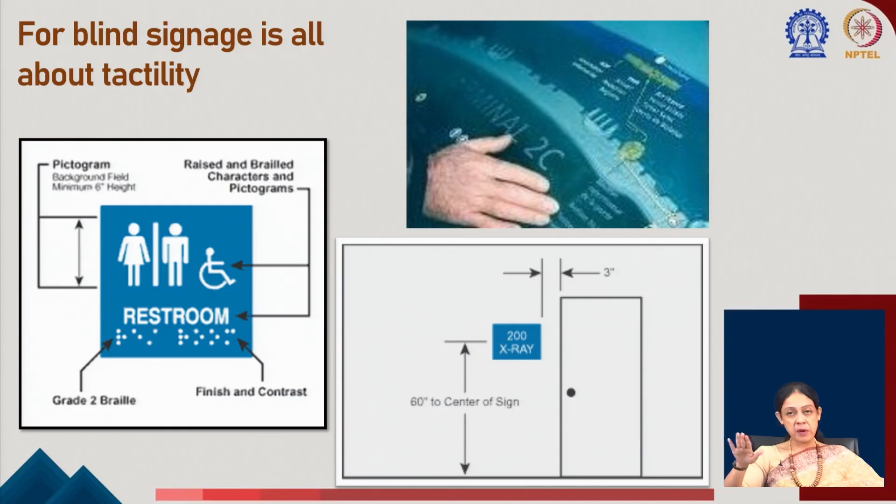As a result, there has to be some kind of restriction on such protrusions. But for people who have absolutely no sense of light, the signage will be all about tactility. It can be braille, or many times nowadays we are using embossed text, that is text which rises above the background so they can feel it and understand.

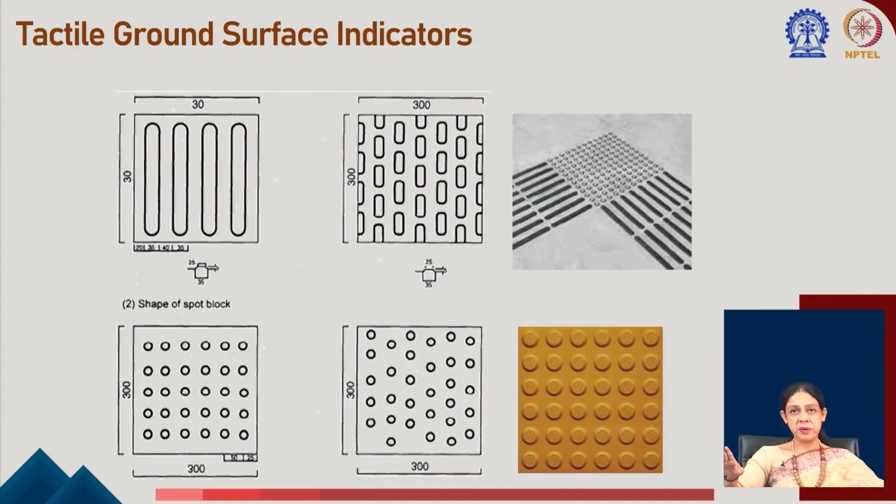TGSI is there, and we have talked a lot about TGSI, so I am not repeating that. What is essential is the proper placement or laying of TGSI. We are aware of directional tiles and hazardous tiles, but what is important for people with vision impairment is to guide them properly, and the most challenging thing is how to negotiate corners or changes in direction.

For example, when someone is taking an L turn, or negotiating a T junction or a cross, it can be something as simple as this, but it is preferred that you have 2 layers of hazardous tile for better comprehension and easy understanding.

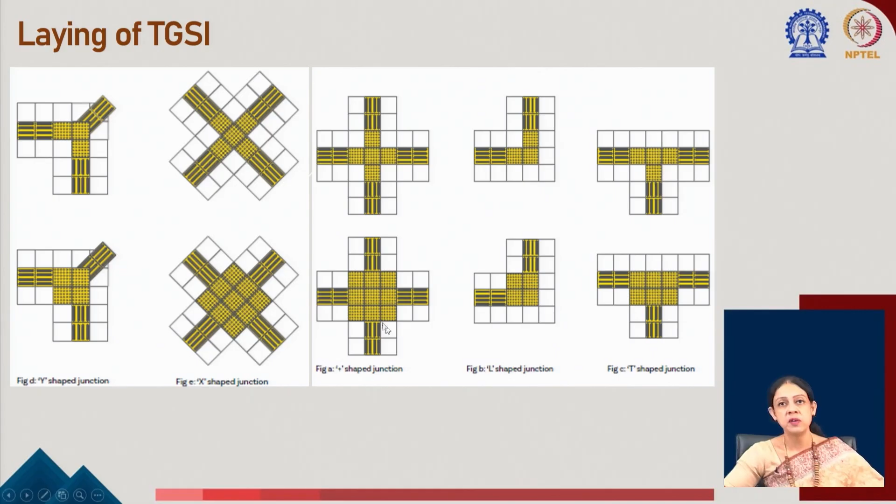Try to imagine when someone is touching the ground with the help of a cane, it is difficult to exactly pinpoint the location. They might be slightly moving the cane, so if you give a wider coverage of these hazardous tiles, it is always better.

There should not be any compromise with the laying of this TGSI, and this should actually lead to every point of interest, what we call POI. So every point of interest, or everywhere a visitor might be required to go, should be connected with the TGSI, and when the point has arrived, it should be indicated by a row or layer of hazardous tiles or warning tiles indicating the end.

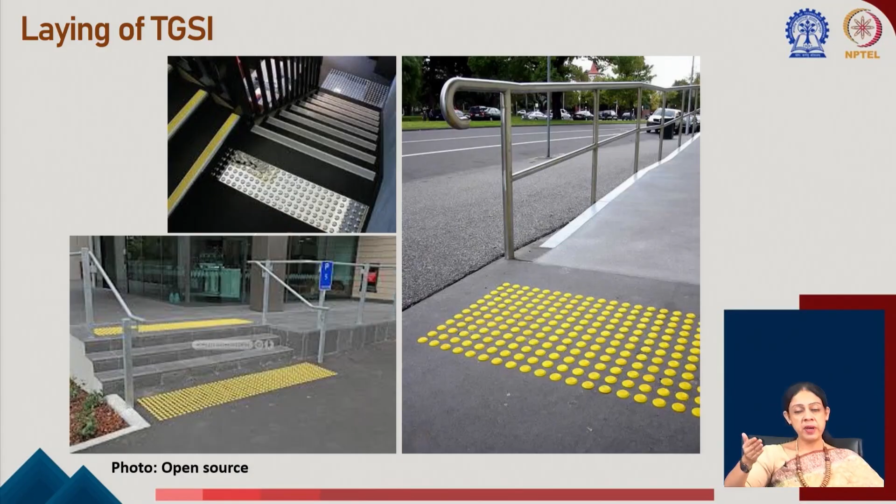Another important point is whenever there is a level change, there should be TGSI. Whenever there is initiation of a pathway or a ramp starts, as well as ends, these should be demarcated and identified by hazardous tiles. So any beginning or end of a route, at one level or at level changes, needs to be identified or marked by hazardous tiles.

In case there is some obstruction in between, the tile should be laid in a way so that people can avoid that. This might not be a major obstruction, but there could be a lamp post or a tree or something like that, so this laying of tiles is very important.

Needless to say, it should not be unnecessarily elaborated, the layout of TGSI. It should follow the minimum path. The minimum path of travel should be the guideline or the guiding factor for laying of TGSI.

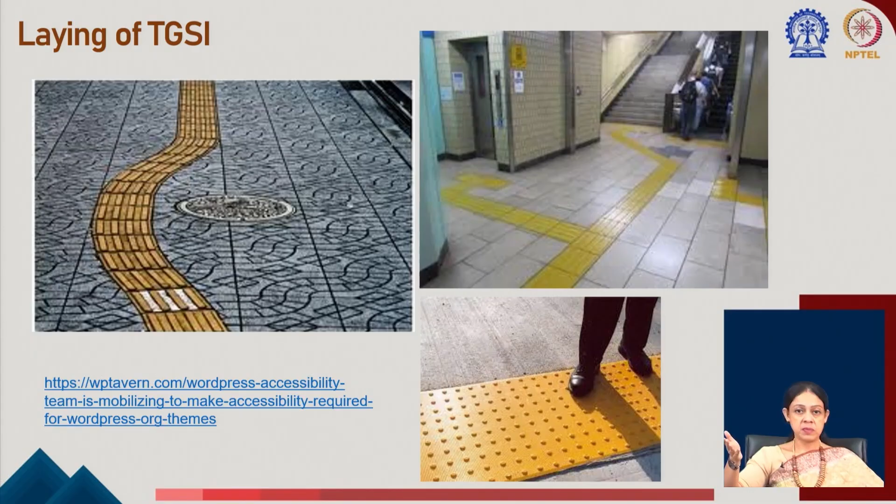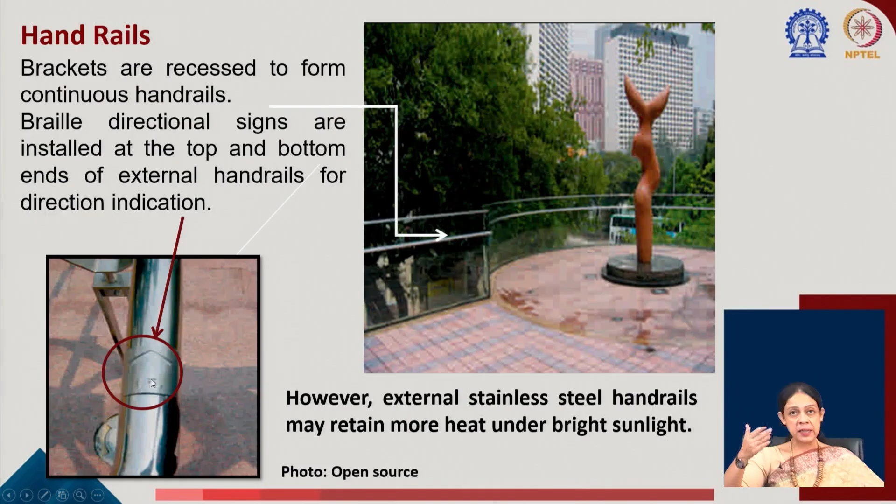These are an advancement over the physical layout that we talked about with RIAS, that is remote infrared audible signals, or signage system. This relies on infrared communication, and a company developed this under the brand name Talking Signs, which pioneered the implementation of infrared communication systems back in 1993. Mitsubishi Precision Company joined hands, and since then research and development has happened, giving us many advanced technologies in this field, which we call talking signs.

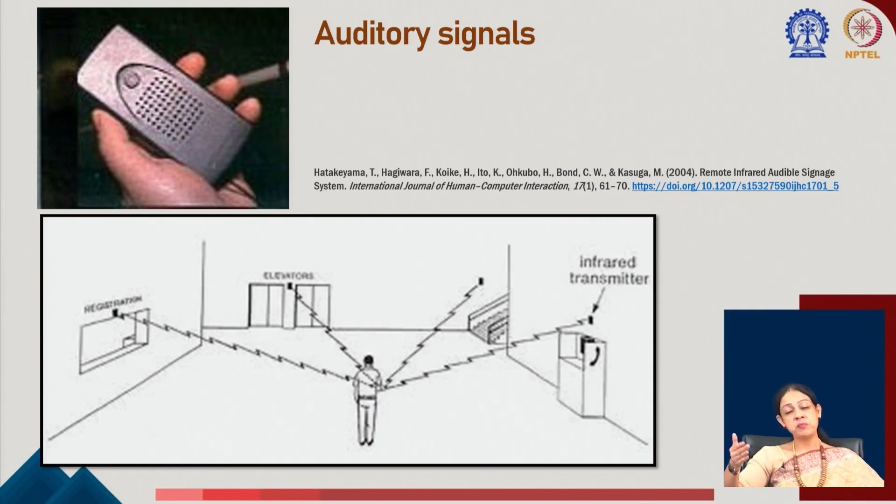The mechanism is that auditory signals are captured through infrared transmitters, which are planted at different points. Earlier we had TGSI, which would lead you to spaces, but would not tell you which direction to move to reach a facility. Infrared transmitters, if planted properly, will tell you exactly which facility is where - whether to go left or straight to reach the elevator or registration desk, something TGSI cannot do.

This is a receiver with two components. One is a receiver, generally accompanied by a neck strap, with speakers, on and off buttons, and sensors. When the infrared beam transmits the message embedded in the sign, these talking signs go to the handheld receiver, from where it is heard through the receiver speaker.

Simple mechanism, but very useful for independent navigation. This is the handheld receiver part, and this is the transmitter. So a transmitter placed above a doorway will give it an identity, so someone can follow it.

So what is the role of the architect and designer? To plant these transmitters in strategic locations, and to be aware of this mechanism, and specify transmitters which are used by the majority of people and have a good reputation in the market. If you remember the universal design principles, we discussed it should be compatible with various devices - so compatibility is important.

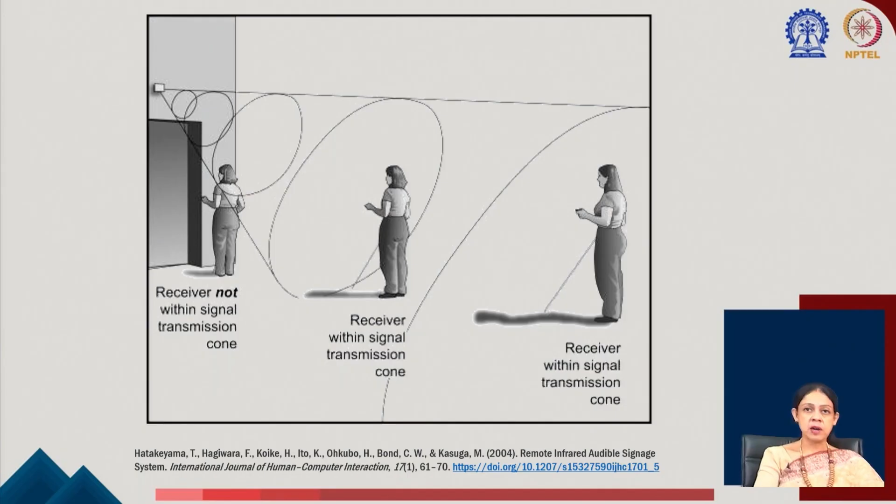Ideally, every transmitter should say what is available where - refreshment, coffee, newspaper, magazine, or that this is the exit to 4th street. This is how the person carrying the receiver gets this information.

Now, moving to design for people with low vision - these are different kinds of visual acuity problems. If this is normal vision, loss of central vision generally happens due to macular degeneration, advanced cataract with age, or lack of nutrition. Sometimes due to a head injury or cerebral stroke, half of the field of vision is lost.

What is the implication of all this? Someone with blurred vision due to advanced cataract would probably only react to very stark contrast - like a white door on a white background cannot be understood. But a brown door on a white background, or a glass door with a contrasting yellow or orange frame against a white background, can probably be understood.

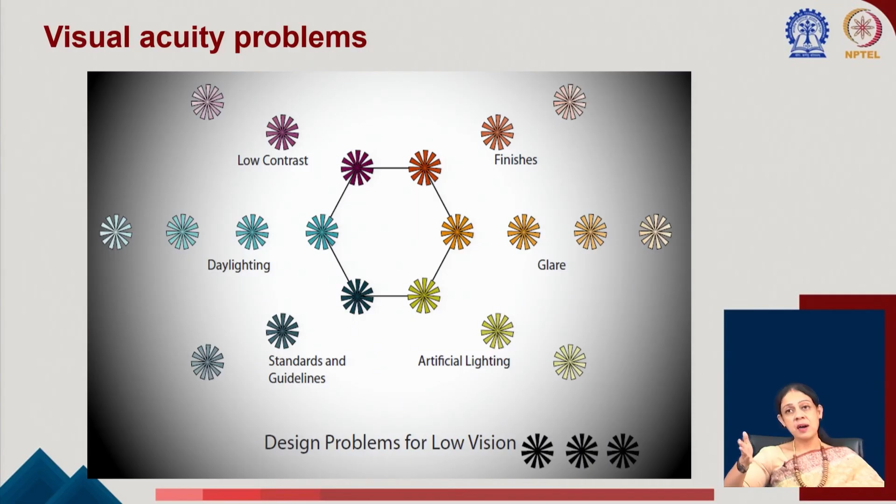So these are some visual acuity problems related to interior space design. Let us discuss this one by one.

First one is contrast sensitivity. Many times people are not able to distinguish an object which has got poor contrast with the background. People who do not have good 3-dimensional perception - if a white object is placed on a white background, they will not be able to appreciate the depth of it. So they cannot understand that there is something there, and they may go and hit it.

When designing spaces, particularly public spaces, many architects have a passion for monochromatic rendering, but that might be a problem for some people. This is just for the sake of awareness, because this happens due to the lack of ability to perceive an object in its 3D entity, its 3D form.

If there is a lack of contrast sensitivity, where the horizontal surface is ending and the vertical surface is beginning, it is difficult to understand. That is why, particularly in this hospital interior, these therapy spaces are generally marked by deep colors or dark contrast colors at the junctions. Also, the handrails or grab bars are painted in contrast color, and the edges of furniture are painted in contrast color so that people can identify it.

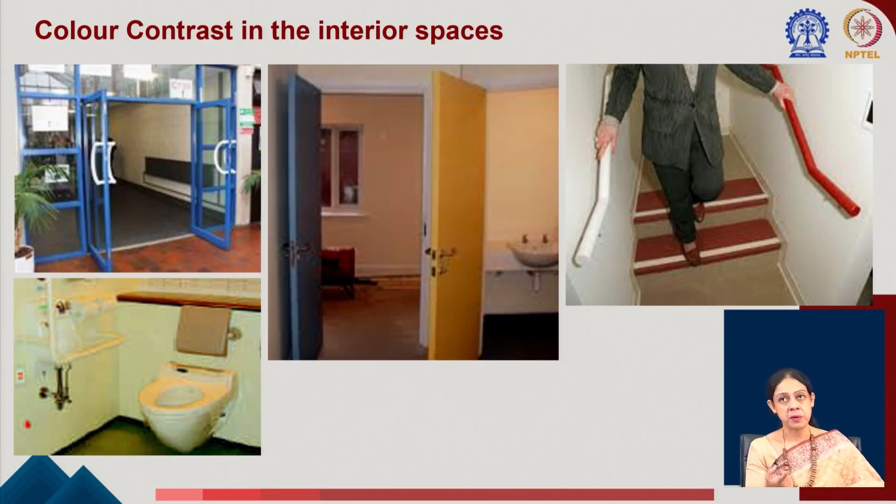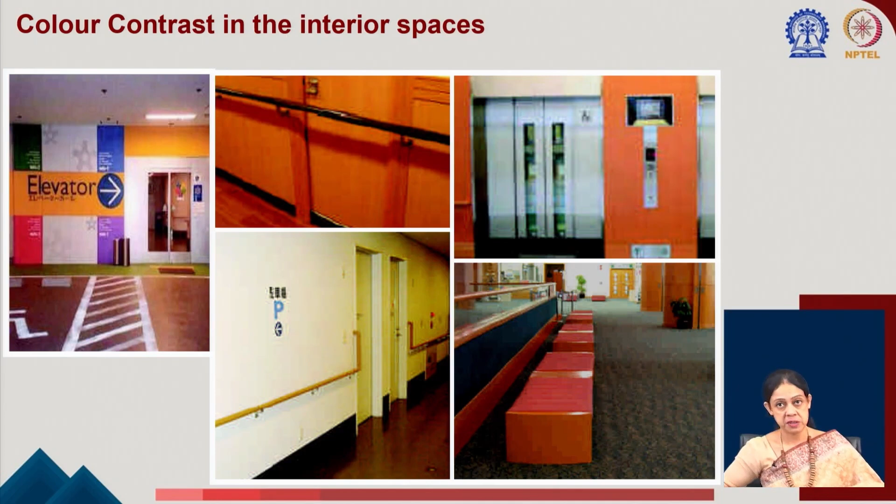When someone is coming from the parking, see the color - the elevator is in orange and dark orange contrast, it shows out. Against the orange, a black grab bar; the lift wall where the panel is has been given a contrast, so that people can easily find it and locate it. The seating also has a contrast.

The same can be extended to external spaces as well, like this sensory park, where the texture is also different. A sensory park is somewhere people who are low vision or have impaired vision can move around and feel different textures - they can feel the concrete, the pebbles, the grass, the sand. That tactile feeling has been enhanced by different colors also, so that it caters to both groups.

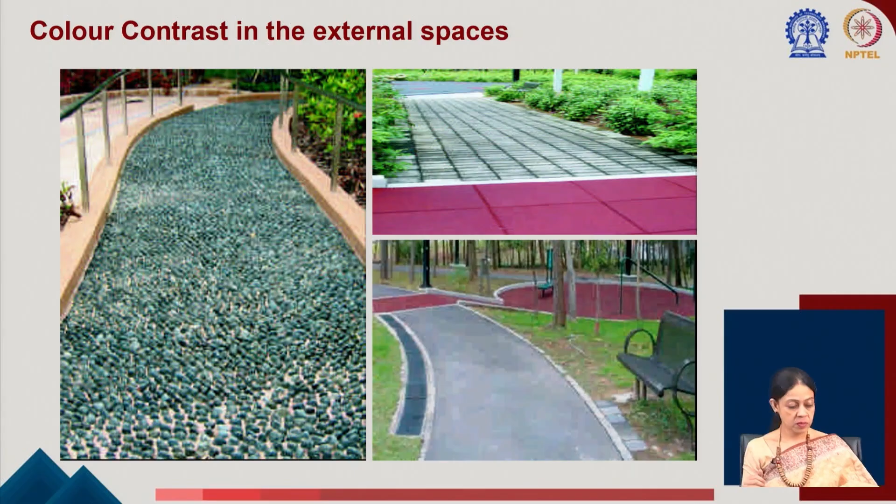There is something called disability glare, like when there is excessive bright light, a source of bright light within a person's field of vision, which creates excessive glare so that they cannot see. Also, there is something called discomfort glare, which is generally light originating from a high luminance source, a point light generally - bright lights close to the line of sight or bright sources against a bright background. So these are some kinds of glare.

Disability glare and discomfort glare are similar, but the difference is that discomfort glare involves a sense of irritation or pain from high luminance sources.

Then we have source glare, like when we use smaller lamps and fixtures to increase efficiency, but the higher lumen output from point sources can create glare, and as you can see, this reflection gives a sense of illusion, creates an illusion.

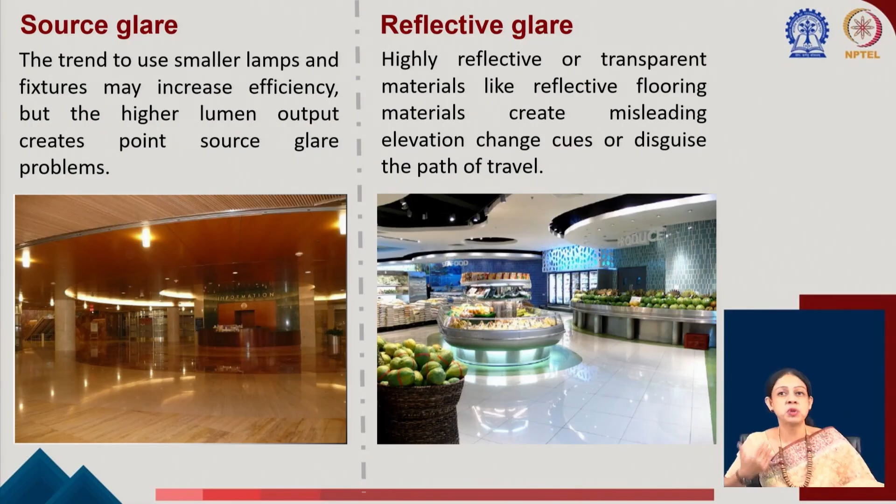Similarly, it happens here where there is a reflective glare, in which someone walking here, when they see this, it gives some kind of 3D perception - it is a misleading elevation change which disguises the path of travel. So we have to be very careful about the choice of material in public places, particularly in the interior.

Now, differential lighting in the transition zone - we know that when we move from a dark area to a bright area or otherwise, our eyes take time to adjust, our pupils take time to adjust. When that is happening, particularly for those who have a vision problem, it is more problematic for them and they get incapacitated for a while.

Shadows. We architects rely a lot on shadows, we play a lot with shadows, we have these projected masses so that they can create a shadow and we get a good elevation. So we definitely would not want to compromise on that and have flat elevations, but let us understand also

that shadows on the building facade may look good, but when certain elements cast shadow on the movement path or on the major public movement path, they might be disabling. Navigation might be challenging because they appear as objects, they appear as a pseudo change in elevation. They sometimes appear as freestanding objects.

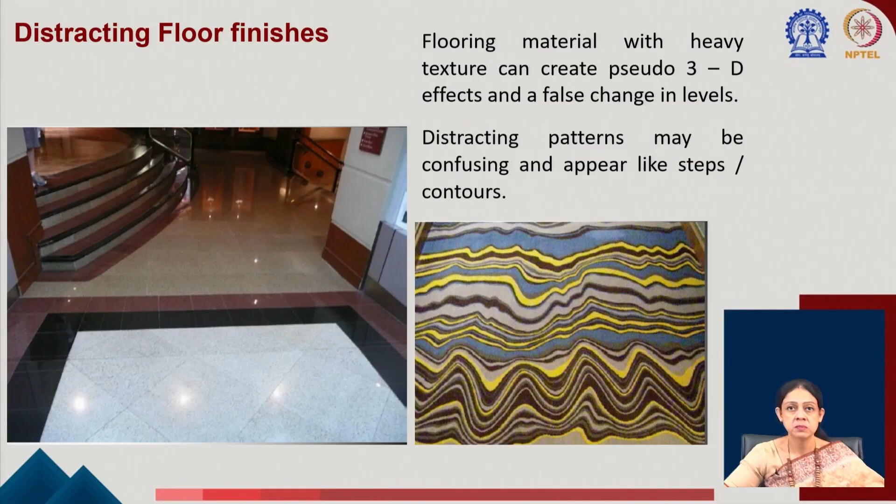So the takeaways: the critical elements are to be made larger and ensure that they have high luminance, so that people with low vision can identify them. Contrast is important. Task lighting is very crucial, because it focuses on the particular task area and does not create any kind of disability or discomfort glare.

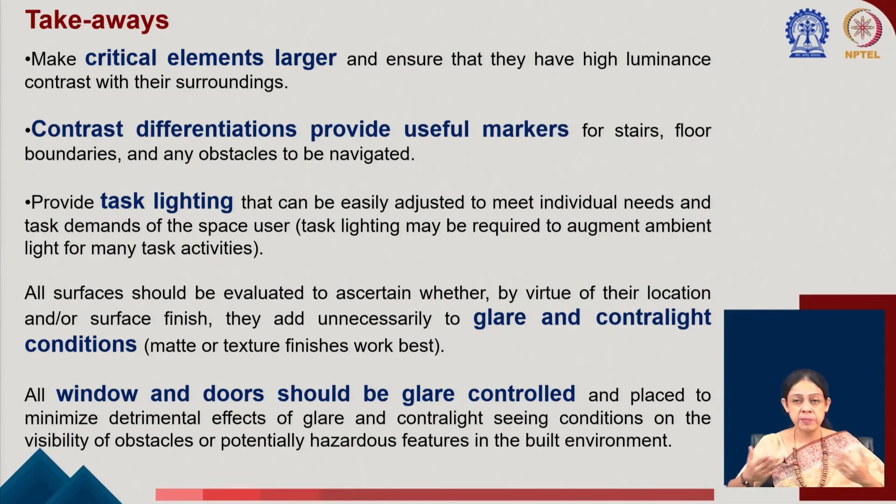If we want to put a signage or something like that, it is important to have a uniform light over that. If a signboard is partially lit, then it again creates some kind of illusion. And for any outdoor spaces, the windows, doors or other openings should be glare controlled to minimize any detrimental effect due to the contrasting light.

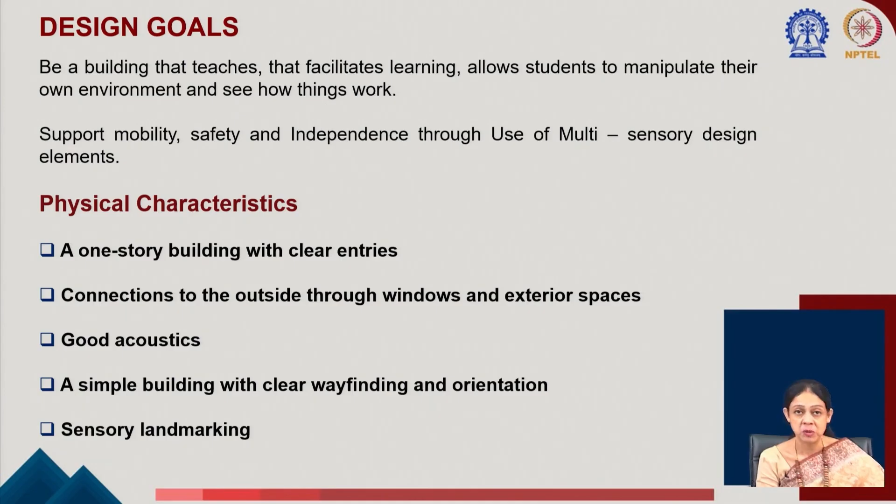And also the building was a simple building with clear wayfinding and orientation to help them, and very important was the sensory landmarking. We talk about landmarks in urban design and in environmental psychology, but these are sensory landmarks. So this was the building, a single story building with a clear entry. This was the vehicular entry, the bus stop, and here were the therapy areas, the playground, a garden, and a bike track.

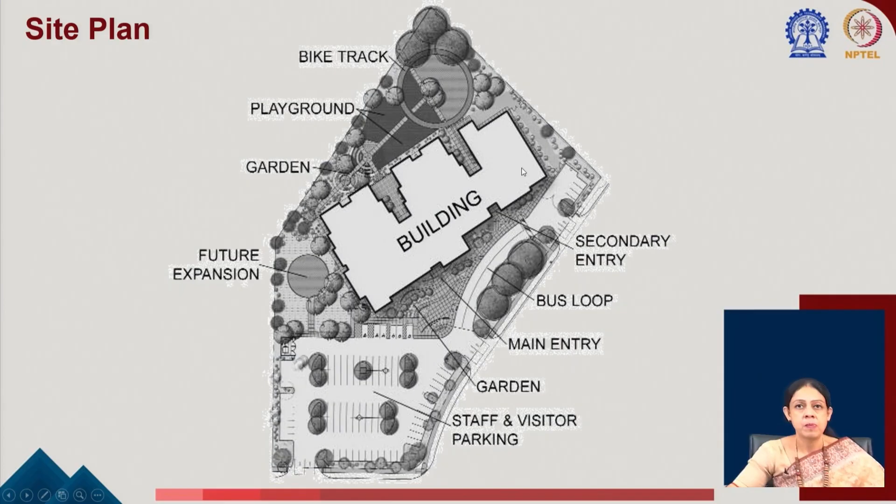So this is the playground. As you can see, different materials are used. The movement path has got an entirely different material from the play zone, because they were getting introduced to the various textures, so that if this is grass, they would know this is a safe area, a non-vehicular area.

So wherever they find grass or this kind of feeling out in the external environment, they would know this is safe. But wherever they feel this kind of concrete, they would know that there can be vehicles, because this is a movement road, this is a corridor.

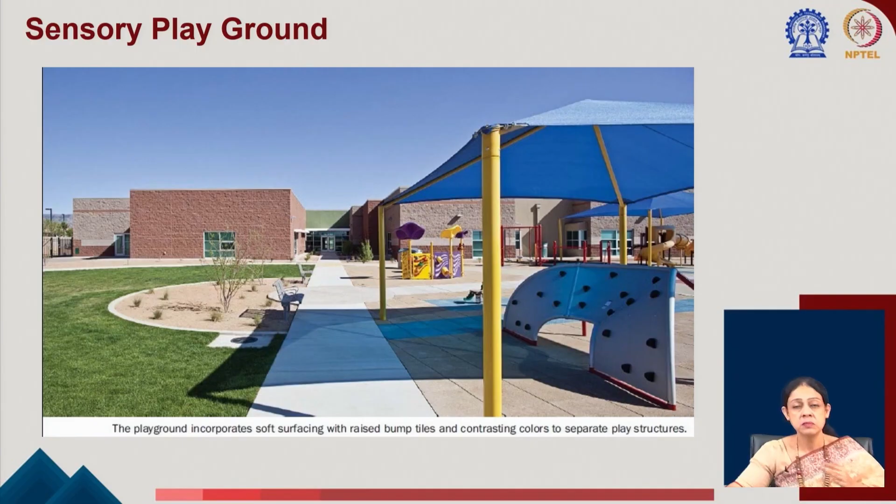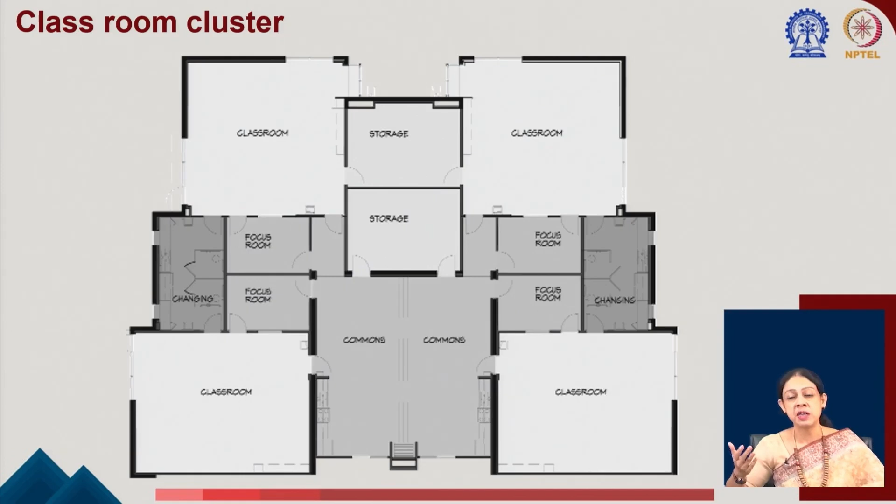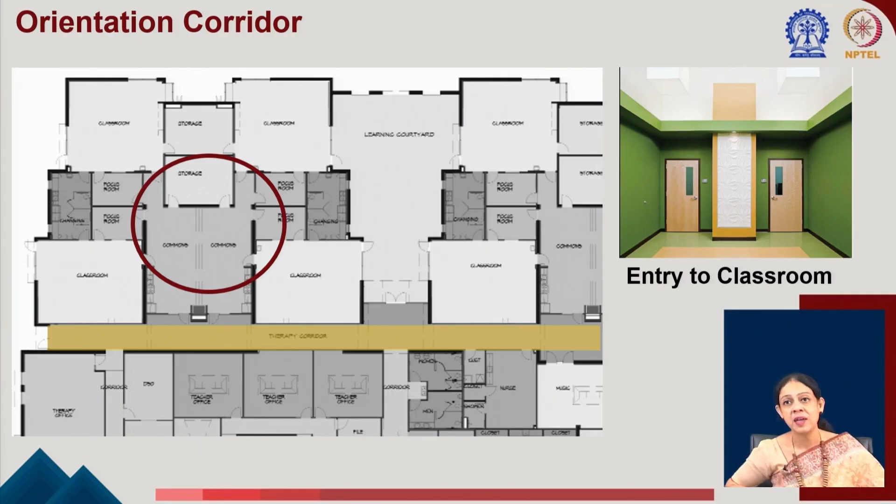So the therapy corridor led to a transition zone. This is the transition zone. Now it had a different kind of wall finish. So when they were moving out from this transition zone, they would gradually move from a smooth surface to a rough surface. So they would know what an interior finish is and what an exterior finish is, so that they know in the real world how things are designed.

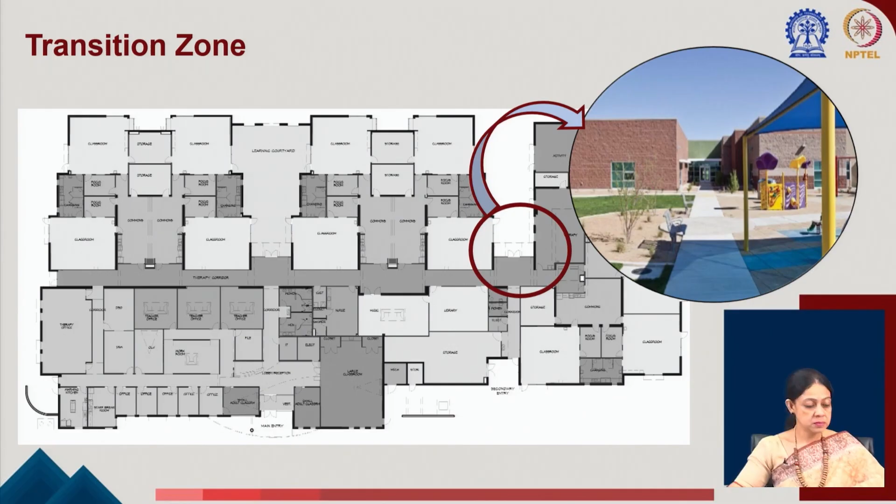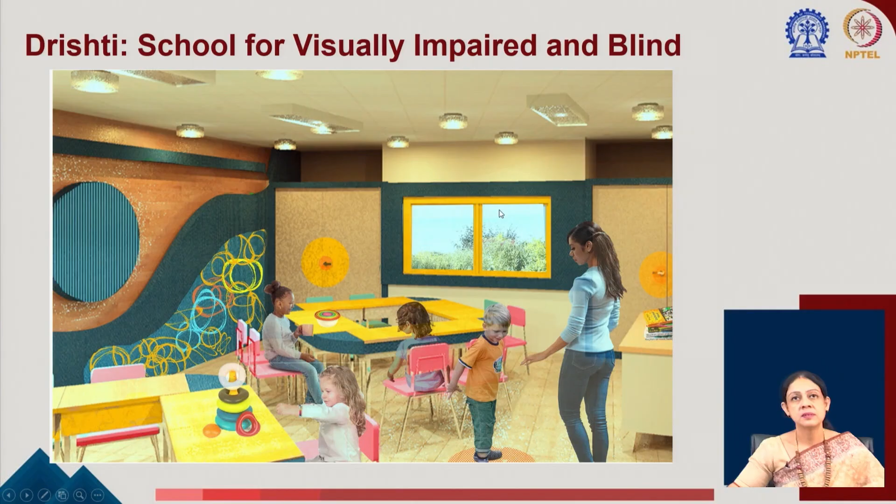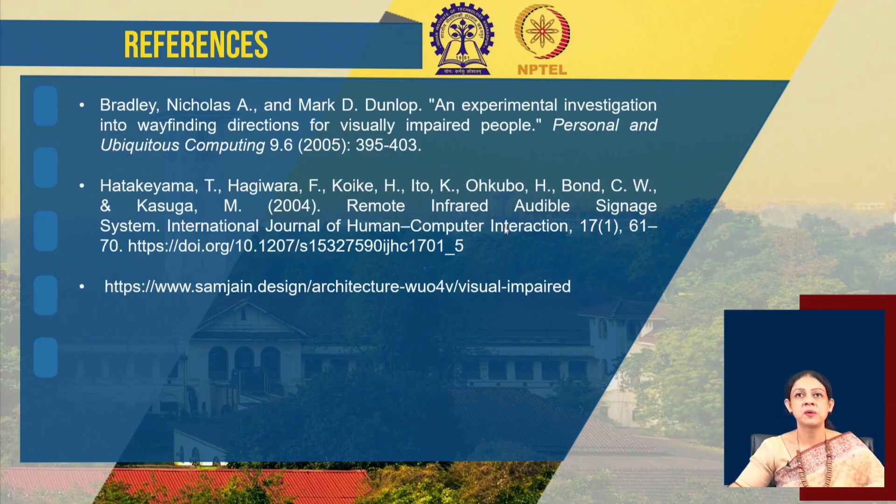Another example with bright colors, sensory elements, and this is a draft from an embossing printer for an architect. Some of the references, papers, the DOIs are marked there. You can go through this, and also maybe you can visit this site.